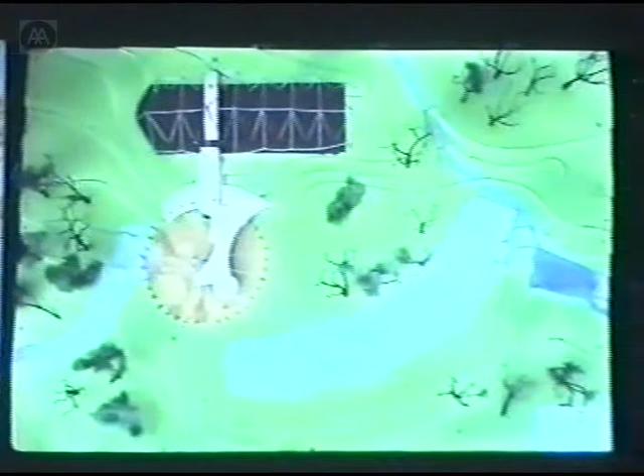And some models which we studied on the left side for the central building, just a tent out of wood, because we said that we could use those wet trees. The forest was planted, I think, '56, and the trees did grow to a height of between 12 and 15 meters, very thin, and we tried to make buildings out of wet wood, where the wood should be drying in the building as an experiment, because we had not the time to wait that these trees could be dry by themselves. Next pictures.

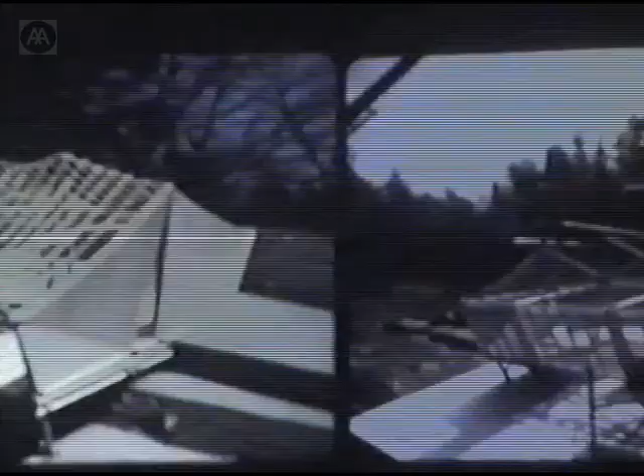This is the so-called master house. It is hanging trees from the ridge. On the right side, we studied the model on the site. If you have a little model, you should go to the site and look where the best site is. The site was beautiful. We remember the day when it was the first time on the site. The ground was blue, from bluebells. It was really beautiful. Next picture.

This is now the ready building. How you call it, master house, or I don't know what is the official name now of the house. I don't think there's anything official. There's no official name, but some of you are going tomorrow to Hooke Park and will see it. I have not seen it now for many years. I hope it's still existing.

Next picture, please. And for the workshop, we made models out of very thin stainless or brass bars, studying the shape. Later on, I used once more these experiments for the World's Fair in Hanover last year. There was a young Japanese architect, he's now pretty much known, Shigeru Ban, and we made the building together. But before we made Hooke Park, next picture please.

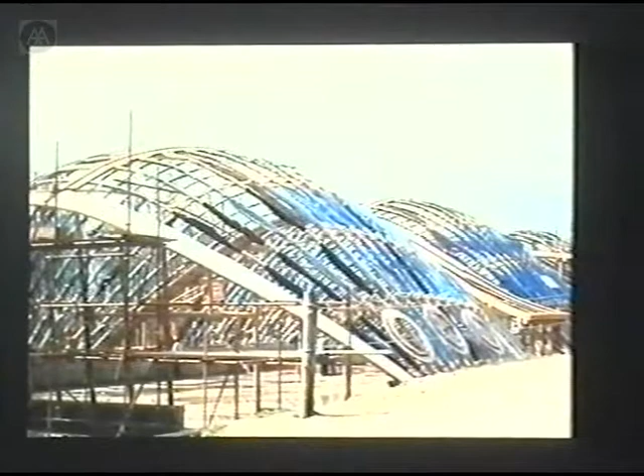And it was like this. You see the very thin members. We studied, of course, how they could be arches on the right side. We pulled them down to make a grid shell out of wooden arches, bending it just by power. Next picture. And this is then the workshop building. We covered it with a tensile membrane out of polyester, PVC coated. Next picture.

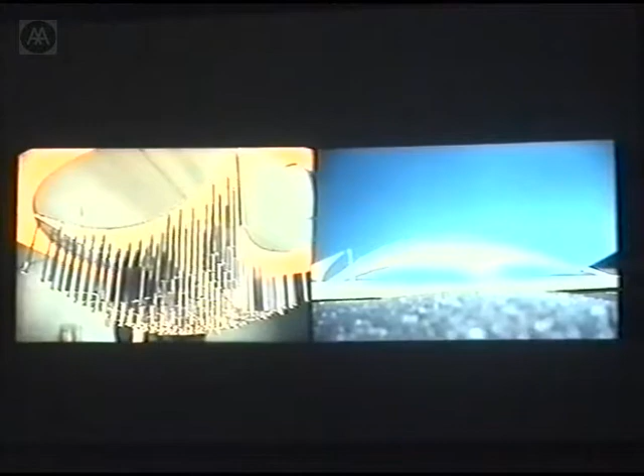And I will tell a little bit about modeling and how to bring buildings out of models. These tests I made in 1958 with my class at Washington University in St. Louis, USA, showing a rubber membrane loaded with nails, and later on converted to make it a shell under compression. We call all these structures shells without bending. They are related to old vaults which were invented long before the Romans. Next picture.

My largest building was the so-called Multihalle in Mannheim, done together with the architects Mutschler and Langner in Germany. The engineers had been Ove Arup and Partners, in the time where Ted Happold was the leader of the so-called Structures 3, a kind of fire police for problematic projects. But it happened that Ove Arup asked me, if you will do a building like this, I would like to do it. And it happened that the German engineer which we had on site said, it is too much for me. I have not the courage to build this building.

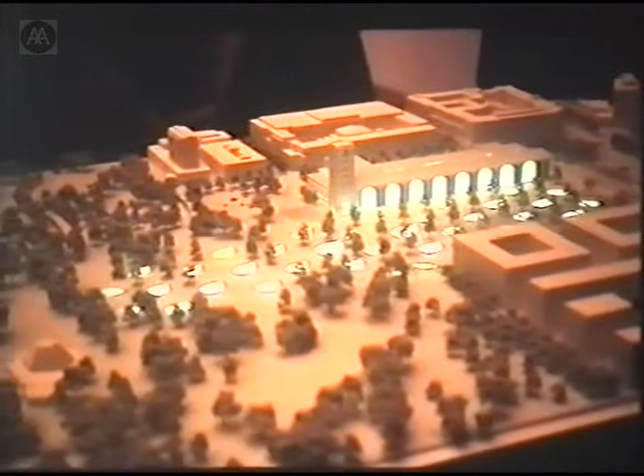And the trains are on the upper level. It's a so-called end station. And this station should be turned into, I don't have the English word, a through station, which is at a right angle. And on the right side you see our design for the competition, to be 12 meters under the ground and to have open holes which are supported by columns.

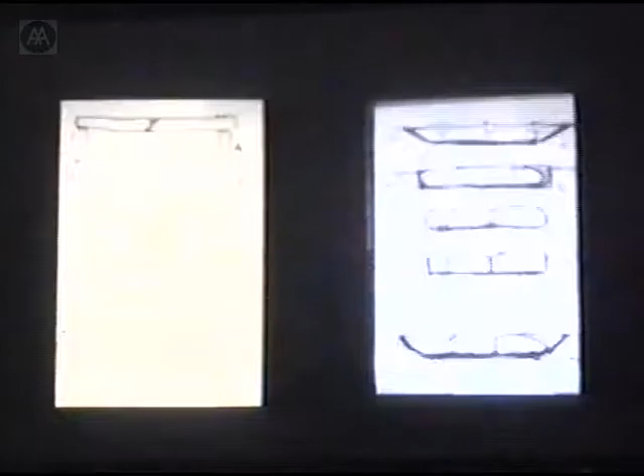And I offered to Christoph Ingenhoven, firstly the engineer, of course, Buro Happold, and especially involved is Michael Dixon and now also Ian Liddell, and joined them together with Fritz Leonhardt, the very well-known German engineer. Maybe you know he invented the concrete television towers and built many suspension bridges. So, next picture. But how to solve the question?

I give some sketches, because the railroad station is only between 9 and 12 meters underground. It is 430 meters long, nearly 100 meters wide, and had only a room between the surface of the earth and streets of these 9 to 12 meters. Very important is now how thick you could make the ceiling, which should be planted, because the room is going away.

And so I remember, if you make a big concrete plate, it should be nearly 2 meters thick. We decided that it is necessary that the columns are about 34 meters apart. It should be a very, very flat space. It would be the largest space of the city of Stuttgart. Stuttgart has about 600,000 inhabitants, but all around are about 2 million in the so-called outer region.

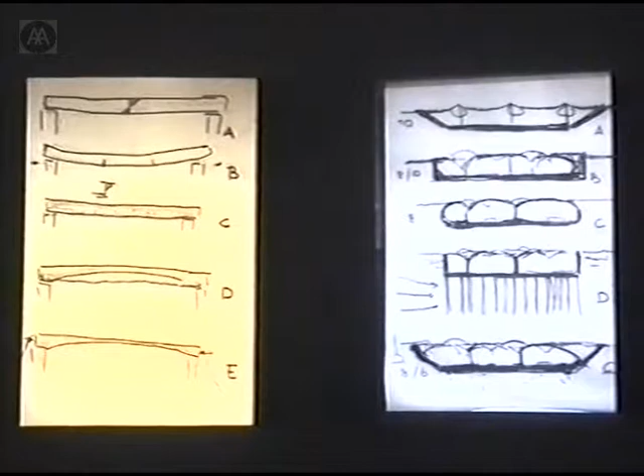And the question is always how good is the knowledge of the engineers. And we know that to calculate reinforced concrete, it is somewhat, I will not say superficial, it is very good for normal buildings of small span. But for a longer span there are problems, because normal concrete always will break. You can, of course, pre-tension it, but with pre-tensioning you can bring the 2 meters down to maybe 1.50 meters, but not more.

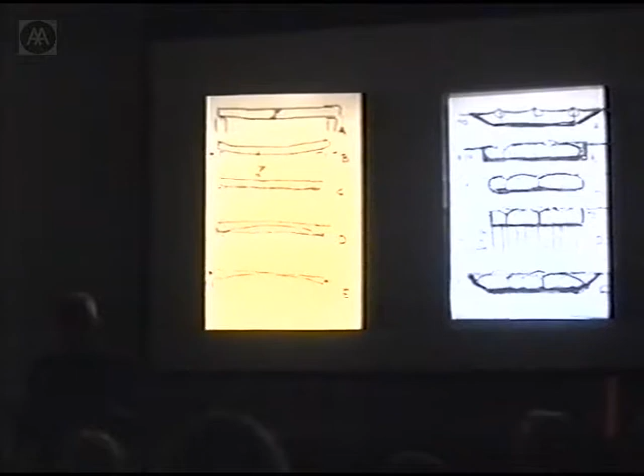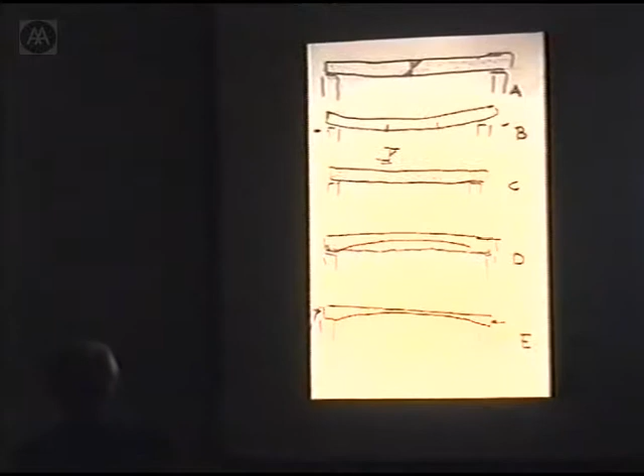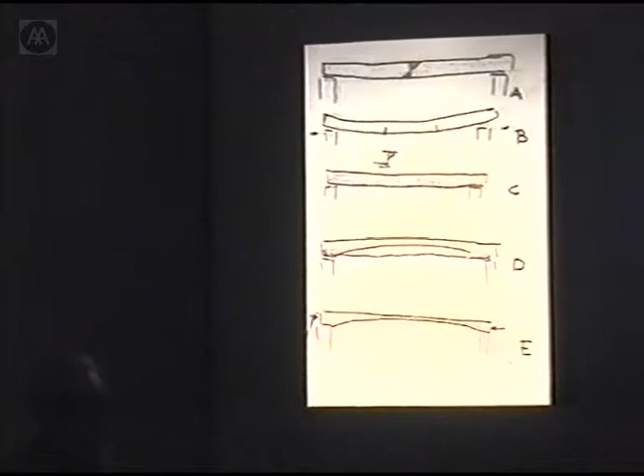And you are calculating with the elastic theory, but there is another way of calculating it. I show you on the left picture. If you put all concrete away which is not in compression, then you will have a two-dimensional thin shell in the concrete. And you could also calculate it in the way shown on the left side. But still, you would have the tension members 2 meters underneath, and we could not use these tension members.

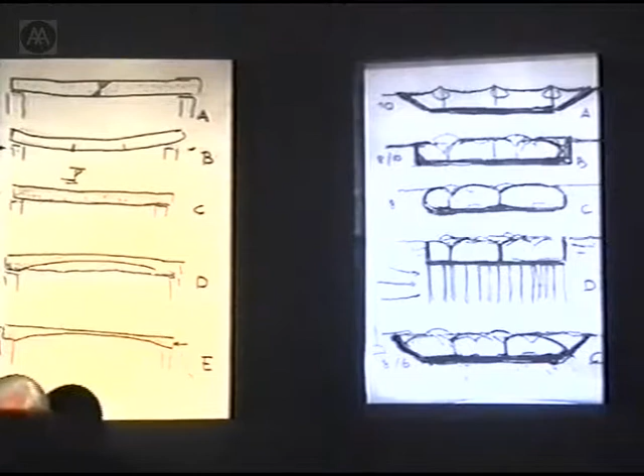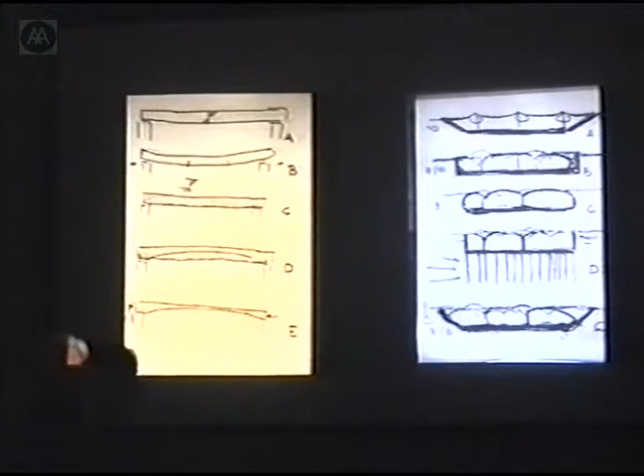On the right-hand sketch, you see the many possibilities we had to solve this incredible question, and just to dig a valley. The valley would be filled with groundwater in a few minutes, because the railroad is just crossing a little stream going out of Stuttgart. Stuttgart is a huge funnel, and there is big water sometimes in rainstorms.

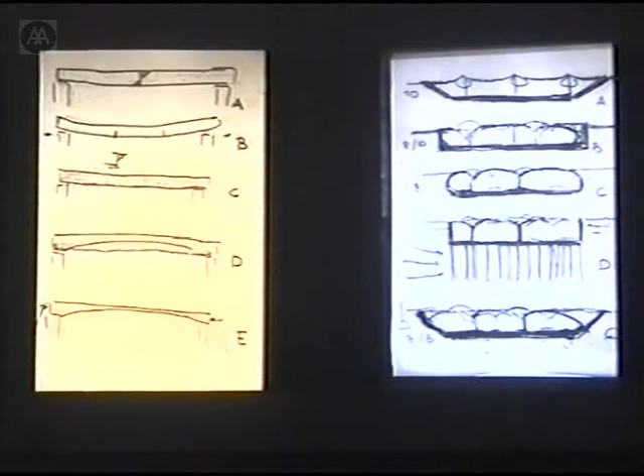So the first upper line was what we did at first: to make this valley and to hang over the valley a tension structure. But then we started also, because the client wanted a section which is under the second sketch there.

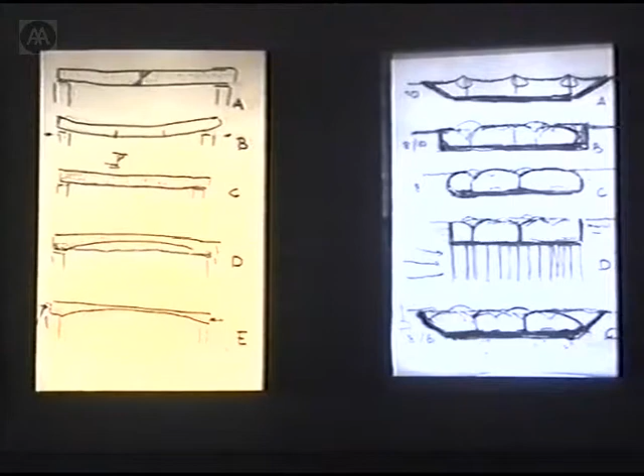But we studied then all different ways, and we are still studying, because it may need 2 further years before the building will be started, and it will not be ready before nearly 2020. It's a very, very difficult question, and I do not know if I will see the building. Next picture.

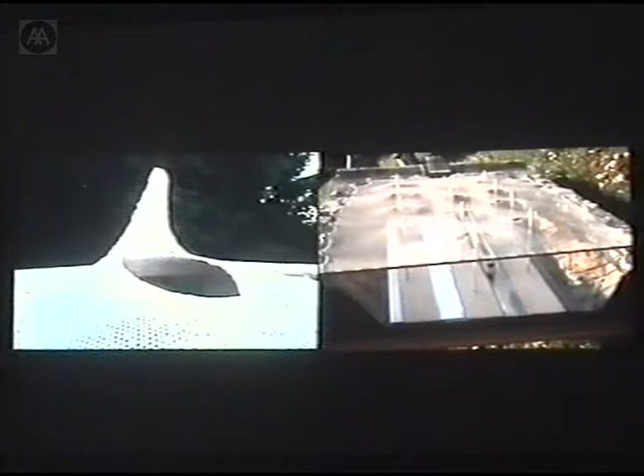And this solution came out at the beginning, but we had only 3 months' time for the competition. You see the cable net, and this would be the structure. Underneath the point will be a mast. And I tried also to reduce the railroad station. That's for 6 lanes, but we have to build it now with 8 lanes. Next picture.

Then we studied the so-called hydrostatic shell. In the ground, and you know it from the London subways, the best shape of a tunnel, especially in groundwater, and we are here in groundwater, is the shape of a tube or a fire hose which is filled with water. This is the so-called water shape, and you can reverse this into a shell and you get out shapes like this.

Of course, they are difficult to calculate. Next picture. Next, please. We have done it. We have been invited by Italian friends and architects for a competition for the railroad station in Florence. And we offered such a hydrostatic shell, but this is much lower. It is about 24 meters below the city of Florence. The tunnels are driven just underneath the city.

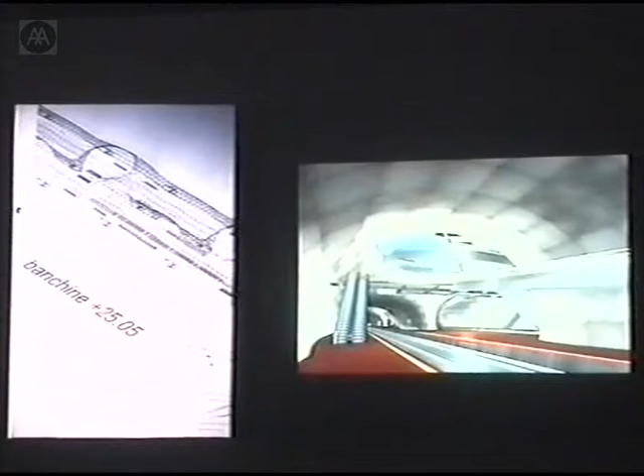But it is possible now to calculate it, to do models and to calculate it, and also the groundwater flow is above the tunnel, in between gravel, and we should not destroy it, because the plan of the Italians was just to make a big caisson, and they stopped all groundwater. It will get an ecological problem. Next picture.

But once more back to Stuttgart. If we have to solve this problem with a kind of a shell, we have once more to study what is a shell, what is an arch. And since Hooke, the famous physicist and mathematician, we know that we can invert a hanging chain into a self-standing arch, or a grid of chains into a standing shell. As I have shown you with the Gaudí model, Gaudí used this method just 100 years ago,

but before was a German architect for the city of Karlsruhe and many others, but no one has proved this idea: I take a chain and let it stand, and the standing arch in the best shape is exactly like the hanging chain. So I used those methods which I had at my Institute of Lightweight Structures in Stuttgart, and we made tests, built it exactly as an arch, even also under load on the right side. I could prove that this is correct, but we could not 100% exactly tell that Hooke and Newton had the right thing.

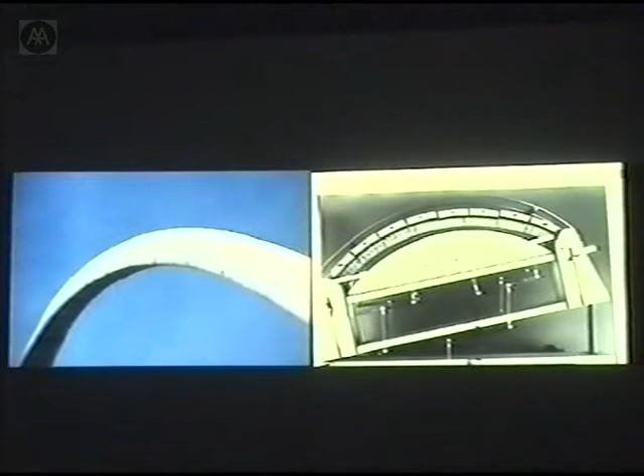You know a little bit that the structure of St. Paul's Cathedral here in London was following this way, and there are 3 domes above each other, and the real one which is taking the load is the cone shell out of stones in St. Paul's. Next picture.

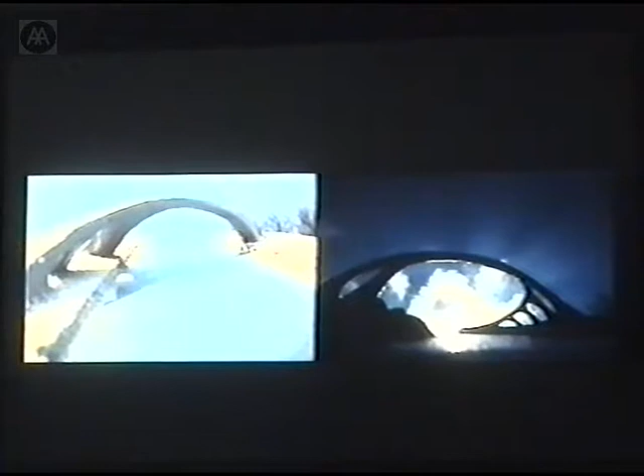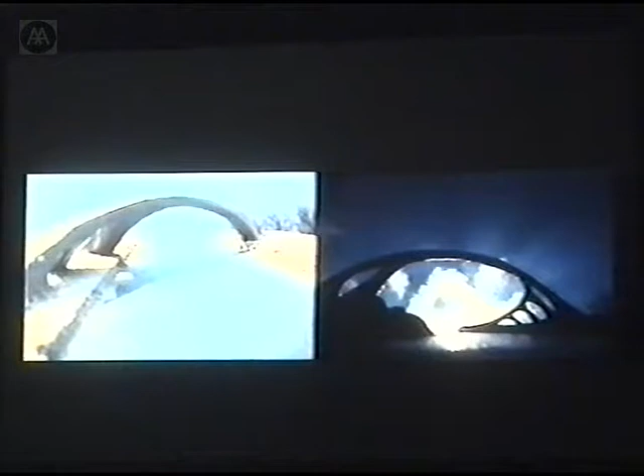When we made these studies, automatically we came to a shape, and here we invented an S-curved arch, maybe to go over the water. Very often a street will move from one side of its stream to another one, and automatically you need an arch which is in floor plan an S-curve. And also we made the design for a bridge which has a floor plan which is more like a U. Next picture.

On the right side, this is the oldest method to make roofs or vaults with stone, the so-called free laid dome. It is not even necessary that these stones are held together. The friction is enough. I was many years ago on the Shetland Islands, and I discovered that about 2,000 or 3,000 years before Christ, these kinds of domes had been built, that means 5,000 years ago, in the Shetlands. They are now broken, but the basement is still existing. Very interesting how early people in your country started to make these buildings.

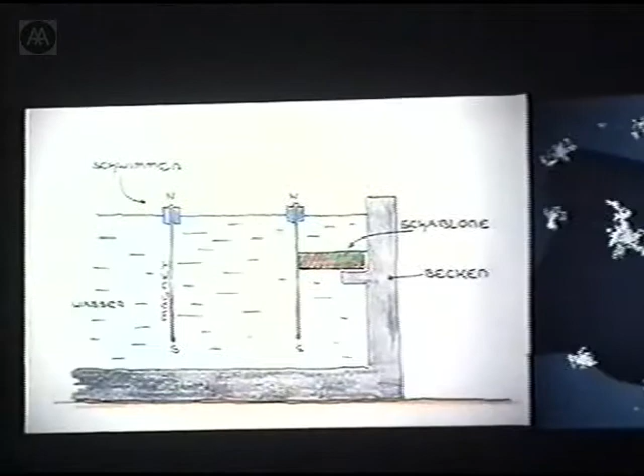It was the model where we then, in the team of architects and engineers, decided we will go this way for the competition. Next picture. But how to put the columns should be used like the model. Of course, in a model we just take a square grid. We are a society of right angles, a Cartesian society, right angle, right angle.

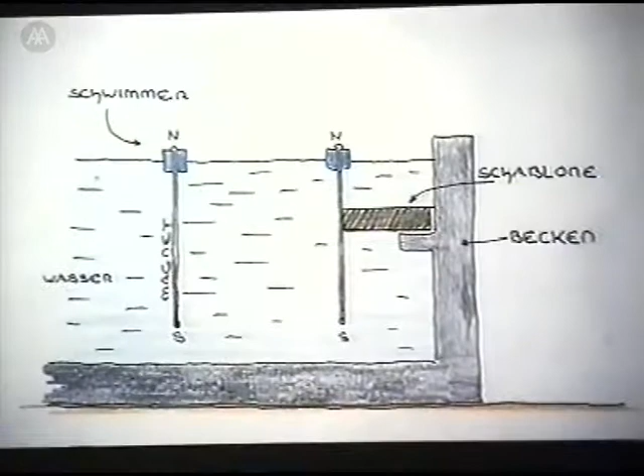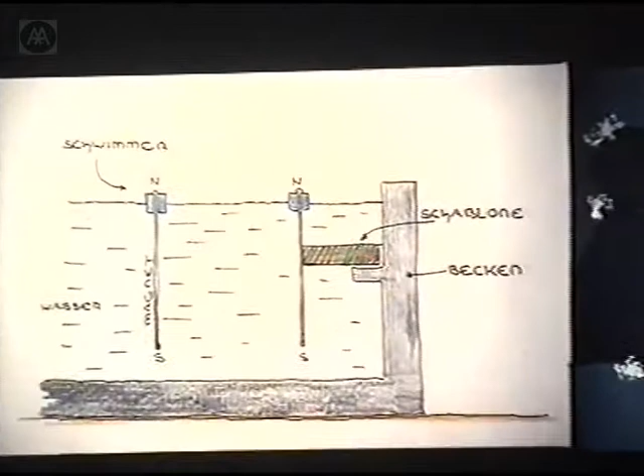But if you want to test how the columns should stand so that every column is taking the best space, we invented a method which is this one. We take little needles, make them magnetic, put a little point of styrofoam on there, and if the magnetic forces are parallel so that always one pole is above and the other one below, then they have the tendency to swim apart. And if you have a closed frame in water, they fill this frame in the best possible way.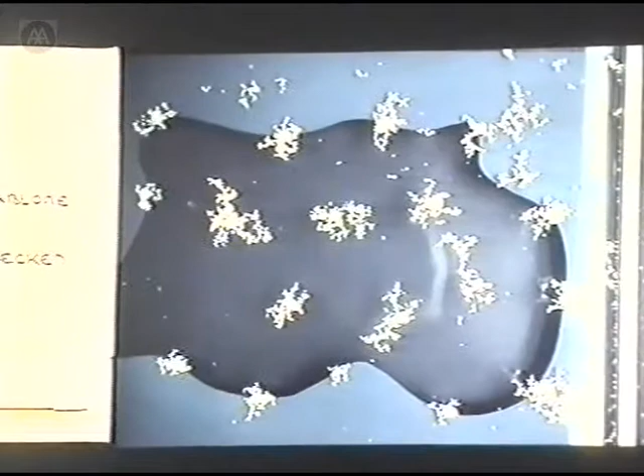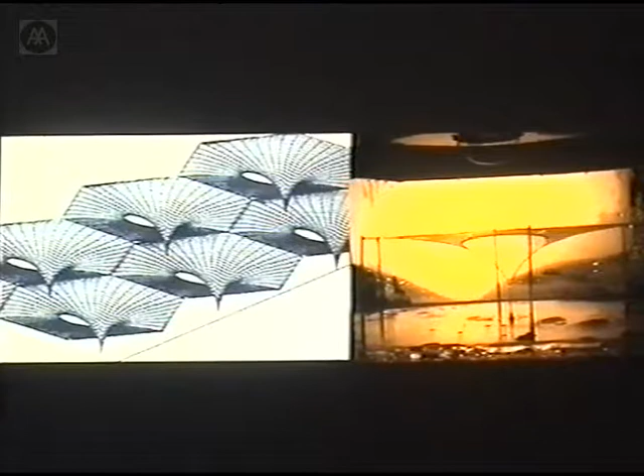And with this play you could study cities and how man is covering earth, or the earth which higher animals are using, like eagles or foxes. And we made these studies also. I developed it much earlier, and did then change the position of the columns. Next picture. And we made then the columns in a hexagon grid.

This is a calculation on the left side, a so-called minimal surface calculation by friends of mine, who have been my students, Bodo Rasch in Stuttgart and Jürgen Bradac, and the inventor of this method of calculation is Eberhard Hauck. It's called the LISA. And you are getting out the same thing as on the right side. On the right side is a soap bubble.

And in the soap bubble, if you put a little hair inside and destroy the soap bubble in the middle, then you get an exact round circle. But if you pull on one point in the circle, you get a shape like this. I use the shape for many buildings. I have shown you our Montreal Pavilion, and also for the Olympics in Munich, also for my institute. You get a wonderful curve.

This curve, which you see on the right side, around the hole, is a peculiar line. It is a line in space with only one radius of curvature. It has exactly only one radius of curvature, but not a circle, but the line starts here, is going around, and is coming back to the point where the forces are meeting. It is in space a curve with one curvature. You know another famous one, it's a spiral line. Maybe you could use it as a spiral stair.

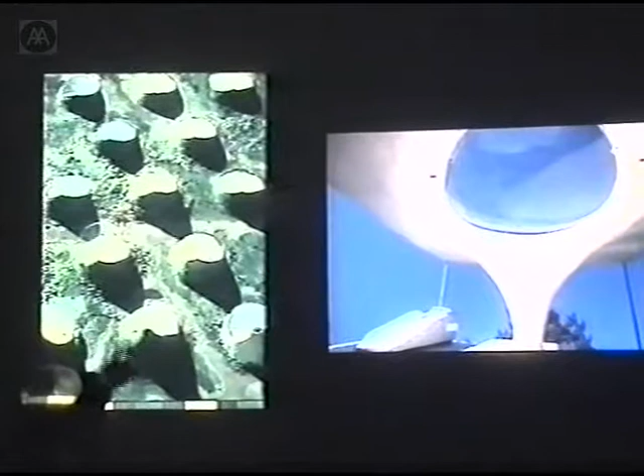Next picture. And we use then this line, and you see how the holes are now put in order, but a little bit disturbed because they should stand in the middle between the rails, so that people can see it well. And from a certain line it looks nearly like a circle, but it is a circle in space. Next picture.

And this was the answer, and with this model we did win the competition. And we are of course happy, but then the big work started. And so we are now, you will not believe it, 6 years on the work. Next picture. This was a railroad station, Stuttgart.

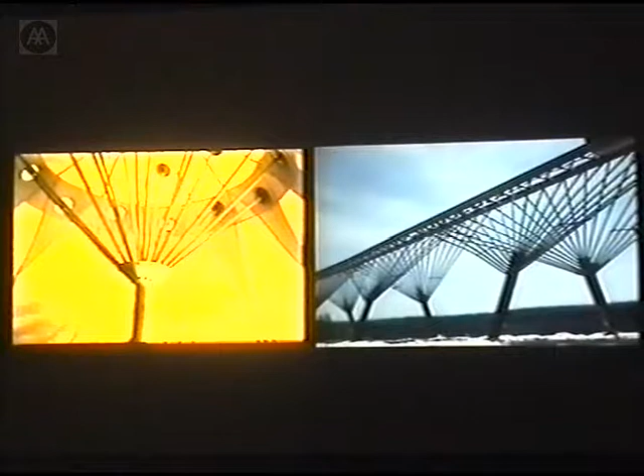Now, just 5 weeks ago, we could open 2 new bridges, which we built, and I show you a little bit the history. It's a footwalk bridge, 120 meters long, but the story was always you could use straight bars to solve some structural problems.

I used them for a so-called hump tent, which we built in 1957 with a great tent maker, Peter Stromeyer, a tent which is curved like this with straight bars to connect the canvas with a pole. But be careful: at the point when we wanted to erect the tent, it just collapsed, because it did turn at this point, and so we had to make the little funnel underneath. The collapse was not a problem. The tent was only 24 meters spanning, and very, very light, and my friend Ewald Bubner did erect it and nothing happened.

But then for another building on the right side, I had a grant from the German government, the Minister for Research, to develop a new runway, or a new Fahrweg in German, a way for the German magnetic railway.

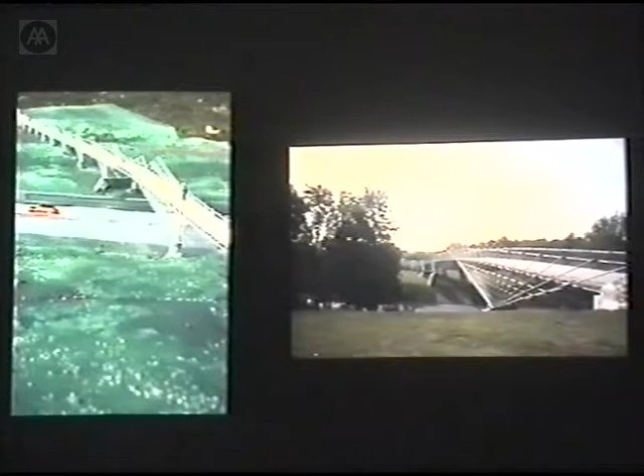But the bridge which we just opened is similar. The model is on the left side, and on the right side is the execution. We made a new trial. We did not build the bridge out of steel tubes, but out of steel bars, full bars of 70 millimeter thickness. And the whole bridge is only clamped with a special clamp, only one clamp, but which is turned, and all the bridge is zinc coated.

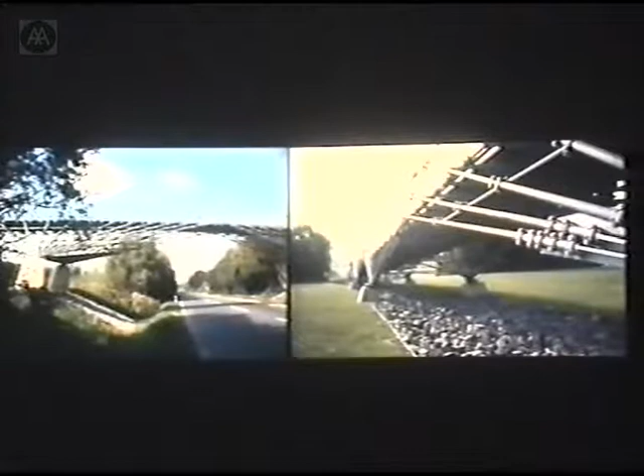As I said, 120 meters long over a street. You see the street will be enlarged on the right side, it's still small, and over a little stream behind, and in a slope. Next picture. These are details. We developed also the clamp with 4 screws. Next picture, please.

It looks on the right side pretty large, but 70 millimeters are really not. It's just like this. The bridge is very, very stiff. Only those bars which are above the walkways have a light tendency to swing, but under foot walking, the bridge is moving nearly nothing.

And I wanted that it's only clamped, and the engineers, this time once more Buro Happold together with Buro Hilbers in Berlin, we all wanted it only to be clamped, but then we had a proof engineer, and the proof engineer should understand also, but sometimes if he doesn't understand, he is demanding. And so some of the points have been welded, which I don't like. But normally the bridge is only screwed. And next picture.

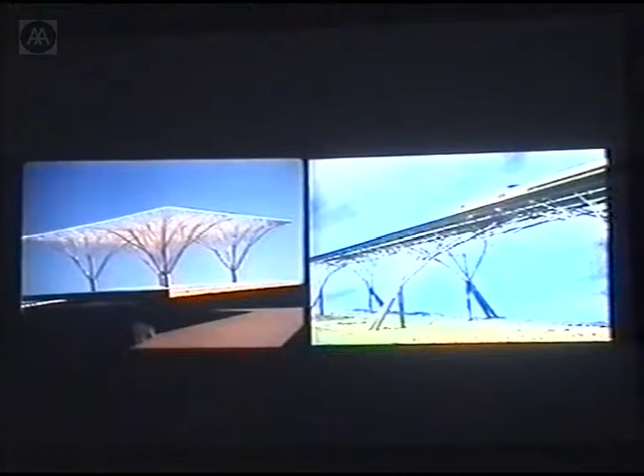I'm coming now to another method of design, which was also developed out of models, the so-called tree construction. Of course, in a living tree the branches are always in bending. And I don't know why the living tree was invented, because branches in bending need the most material. But living nature is not invented for a certain goal. When a thing is in living nature, it is then developed and developed. But you can use this type of structure especially when you put them in compression.

The model on the left side I made with my students at Yale University, 1960. It was hanging like the Gaudi model, not wires, very thin threads, which we bound together and then stiffened with polyester, just make it wet with polyester, and the model could hold an upper plate.

With this type, we made then in the late 70s a large project for Saudi Arabia, especially for the Council of Ministers and the chamber of the new parliament called Majlis al-Shura, and we had some good ideas. And the models were done in Germany in my office. The calculation in Stuttgart for the Majlis in a joint venture between Ove Arup and Buro Happold. And we were sorry we could not build it because King Khaled died before.

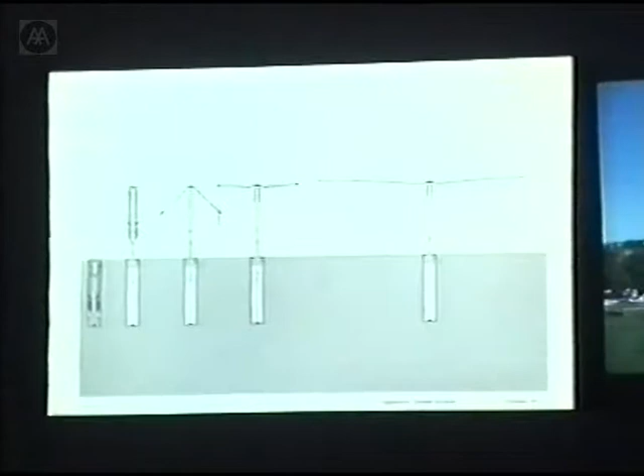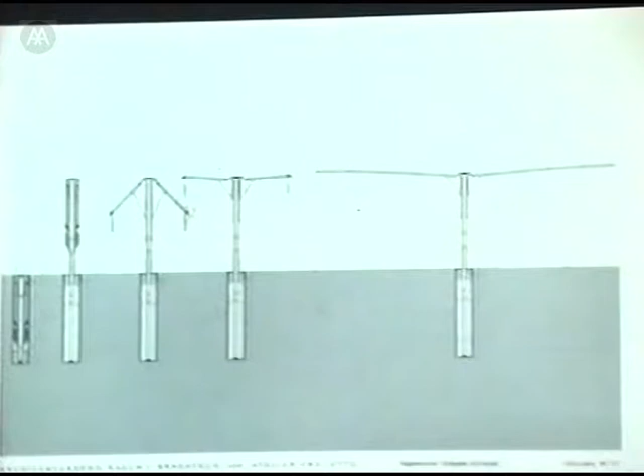The newest project is just for my city. We have not shown it officially to the city until now. This I will do next week in a lecture, so you are the first ones I show it to, for the city of Stuttgart. And in the center is the large Schlossplatz, the plaza in front of the castle, where people are gathering together and sometimes getting wet.

And so we are offering this type of structure, and the umbrellas then have a diameter in the neighborhood of 35 meters. Coming out of the ground and opening like the left drawing is showing, and on the right side the open umbrellas in front of the Baroque castle. Next picture.

Another experiment; the critic Peter Blake called this maybe the only real experiment in housing. It was a building exhibition in Berlin, '85. I was invited to give an example. I said, why shall we not build floors in the air, like an artificial surface of the earth, and allow people to build their own houses with the quality of the self-built house.